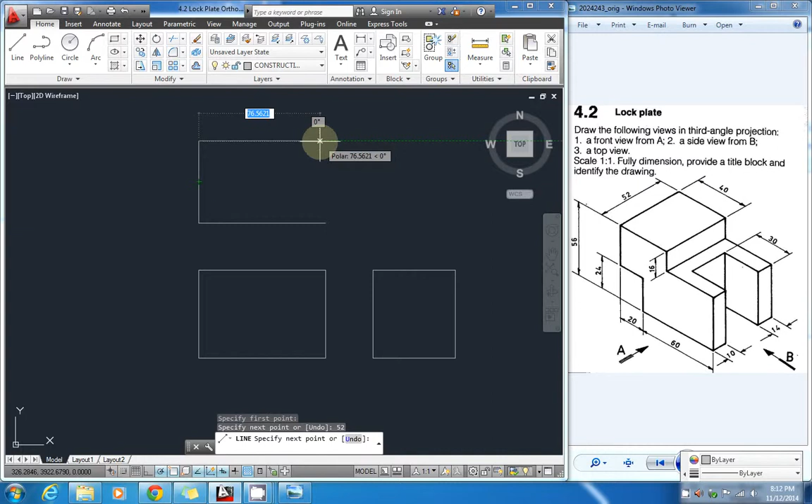Using the text tool, make sure you're in the 0 layer, add some text in, label this one FRONT, capitals, highlight it, and change the size to 5, enter.

Okay, repeat the same for the side. Highlight it, change the size to 5, click outside. That didn't quite work, let's try that again. Okay, key thing, make sure you hit the enter button after you change the text size. So highlight it, change the size to 5, and hit enter.

Alright, we're just going to move our views down a little bit. Alright, we're ready to start now. So make sure you're on the 0 layer.

We're going to go ahead and trace out the outline of the front view. So using a line tool, we'll start from the right side. This height here is a bit tricky. Let's actually start from this corner here, and we'll go this way around.

Starting here, we're going to go over a distance of 40, which is this line, down 16, over to connect, all the way down, back a distance of 60, up 24, connect to the side, and once again connect to the beginning. So there's our front view there.

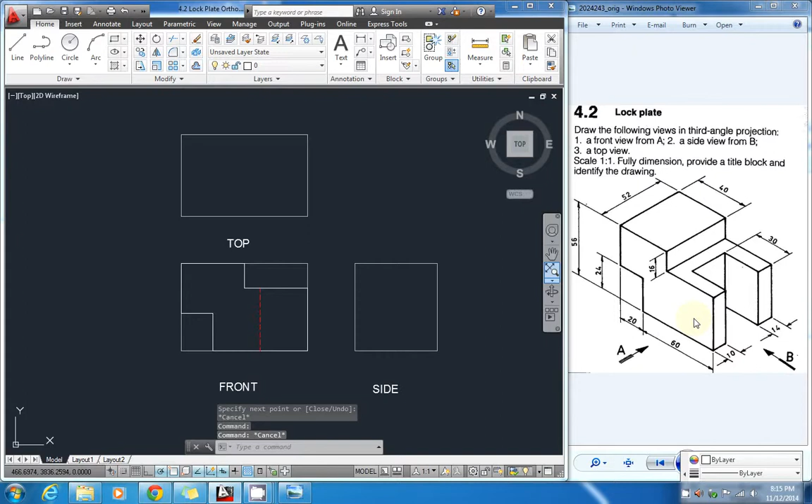Let's work on the top view next. So once again, using your construction lines, using the line tool, bring up each point to your top view.

What can we see? Well, we can see this object here. We can't see that from the top. We can see all the rest of this. So we're going to trace with the hidden detail this line here. So there's our hidden detail. We can't see anything else at the moment.

We know that there's this gap in here. So the gap is a distance of 10 on the left and 14 on the right. So we now need to go back and use our 0 layer. Starting from this corner, we're going to go up a distance of 10 and draw it all the way in until it connects here. We're going to then start at the top corner, go down a distance of 14, and draw that in until it connects. So draw it in here.

Alright, and let's continue to trace our object out. We can see these lines, so let's draw these ones in.

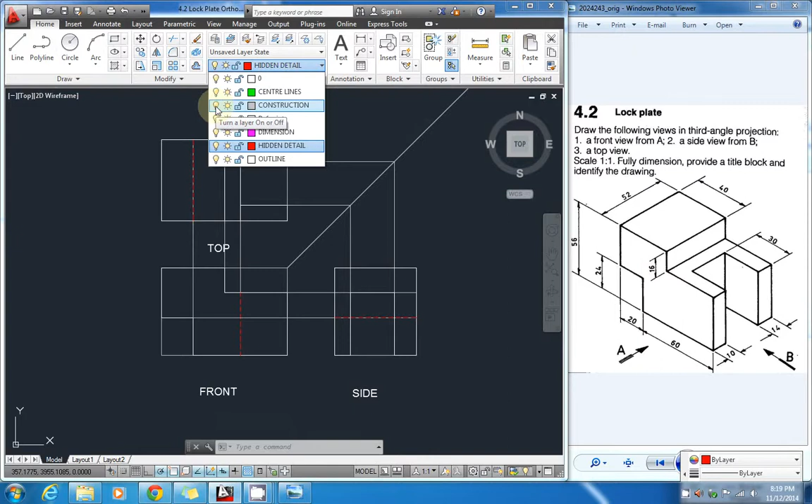Now let's turn off, under the layer toolbar, our construction lines, and voila, we've almost got it. Looks like I'm missing a line here actually, so let's change that to 0 and draw in this line. There you go, so that's complete.

Go to your layout 1, change your text to whatever this one is, so 4.2, lock plate. Okay, scale is fine, that's 1 to 1. Put in your date and your name. Now let's change from paper to model.

Change our scale 1 to 1, and let's make our view fit within the boundaries. Back to paper. You notice I'm missing some dimensions, so I'm going to go back to my model mode. Let's see what we can add.

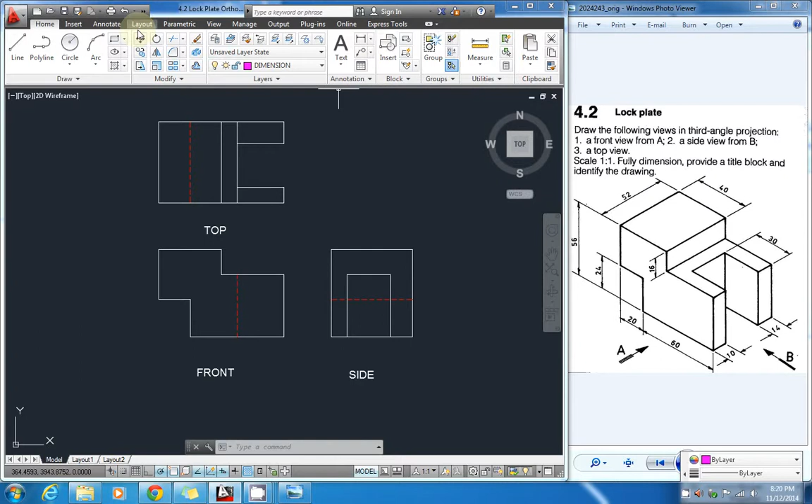So change your layer type to dimension. Annotate, grab the linear dimension. Let's start off by popping the 10 and the 14 in. So, 10.

We'll do that again. 14, make sure it's the same height. Okay, let's add the 52 in here. Alright, so we've done these 3. Let's put the 30 in.

Okay, what else do we need? So we need to add the 16, the 56, the 24. Now that's a bit messy, so let's just move each one down a little bit further.

Okay. We need the 20 here. Oop, let me try that one more time. Okay.

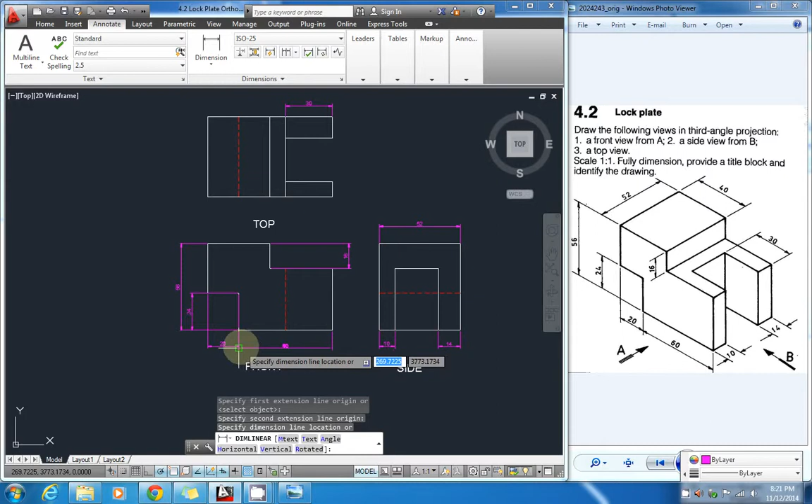We need the 60. We need the 40. And we have the 30. Yes, we get the 30.

So that's it, so let's take one more quick look. These ones here, I can click that line and bring it down. That kind of makes the white line come back up, and I can click this one and drag that to the corner. Alright, that looks pretty good.

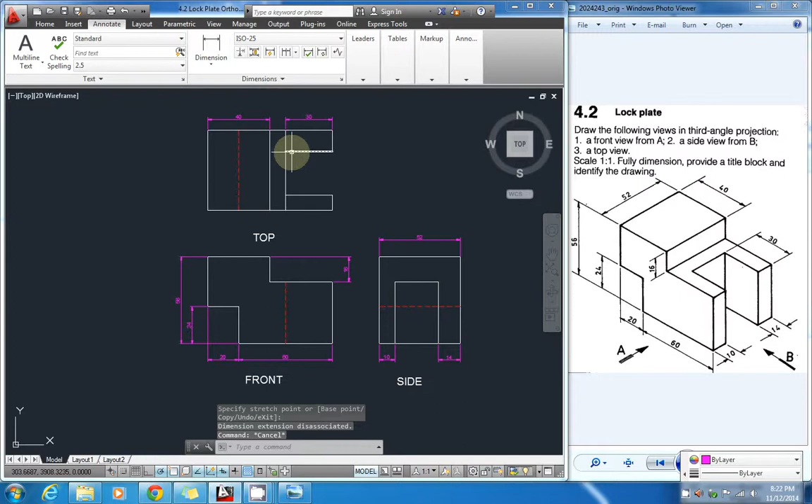We can do the same here. Drag that dot to this corner. Now you notice I'm missing one thing. I need to actually cut that little piece out because it's actually quite flat.

So let's go back to the Home tab. Let's use the Trim tool. So we highlight our object, hit enter, and delete out these two pieces.

We need to fix that, don't we? Okay, bring this one up. There we go.

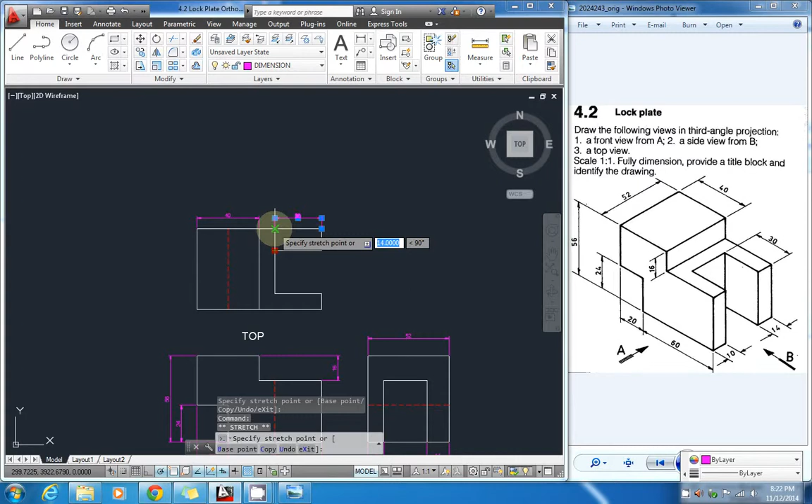Alright, so back to our layout 1, and there you go, that is everything. So be sure to save it and print it.